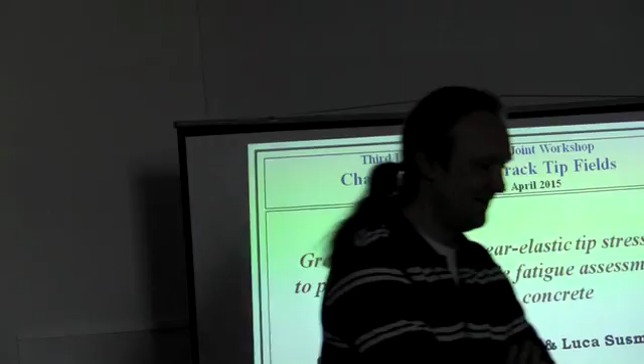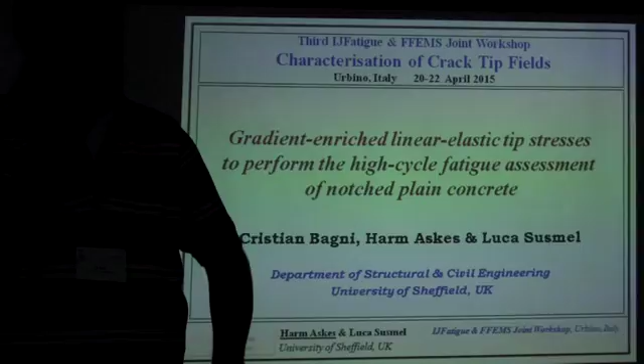Good morning. Yeah, you'll be the finger. Okay, I'll be the finger. Yeah, we decided to go for a double act because there's some stuff in our talk that I don't understand, and there's some stuff that Luca doesn't understand, so we better do it together. Probably if you look at the title, most of it is bread and butter to you, but I want to

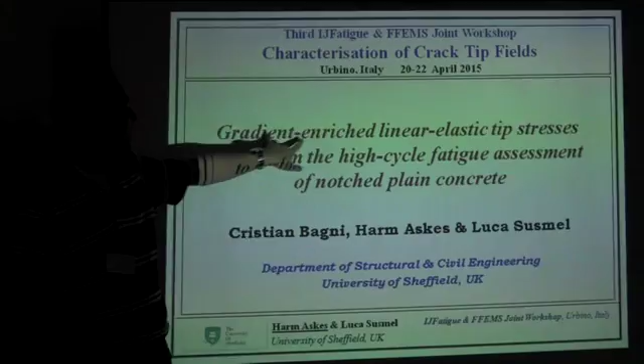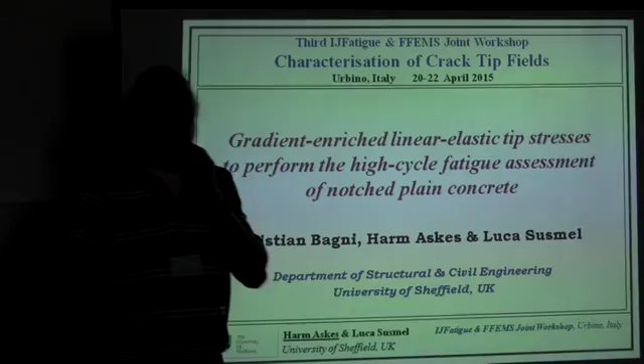Pick up two keywords. The gradient enrichment, where we fiddle with the elastic stress-strain relations to add some extra terms. And also the last one, concrete. I think there's a few civil engineers among us today, I'm one of them. But I think most of you are either mechanical engineers, physicists, or even better.

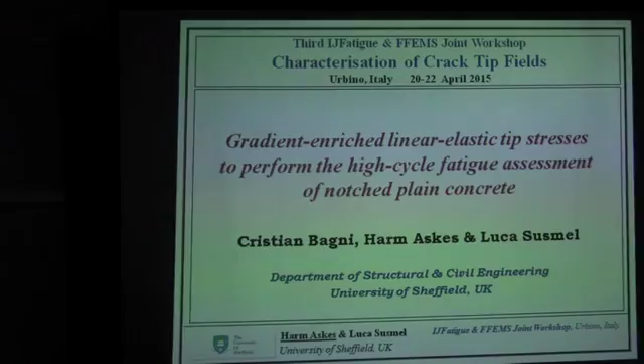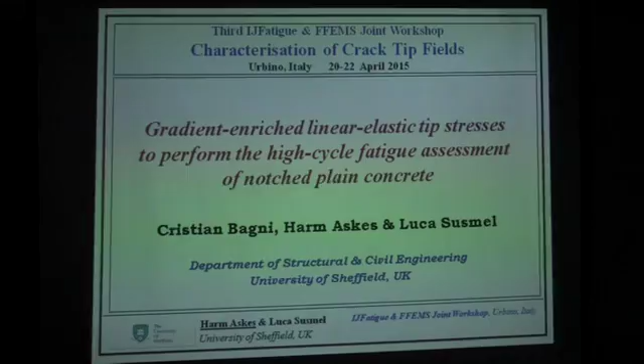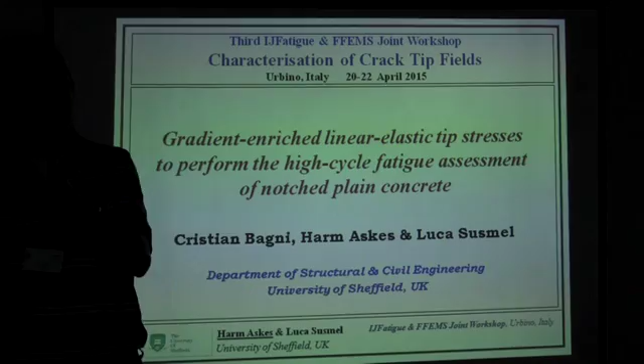Why concrete? Concrete is generally seen to be a bit of a messy material, difficult to control. But it has one nice aspect that suits us today: you can actually separate microstructural geometry from strength. Strength in concrete is governed by the water-cement ratio, and you can in a way control it independently from the sieve curve of aggregates that you chuck in. Yeah, so that gives you something nice to play with.

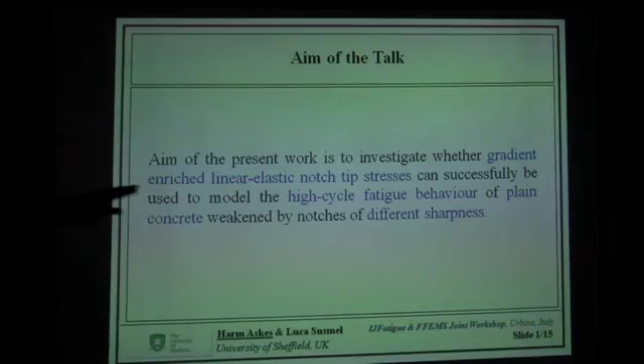This is what we're going to do, so I suppose that's more what you would expect from us. Notch tip stresses, high cycle fatigue, notches of different sharpness and so on.

Okay, when we talk about fatigue of concrete, as with metals, there are a lot of aspects affecting the fatigue behavior: geometry, shrinkage stresses, aging, and so on. But as for metals, the most important aspect is the presence of non-zero mean stresses.

Plus there is another problem: concretes work under cyclic compression as well. So we need a good tool, first of all, to take into account the mean stress effect. By analyzing a large number of experimental data, we have observed that we can simply use the extreme stress in the cycle to perform the fatigue assessment of concretes.

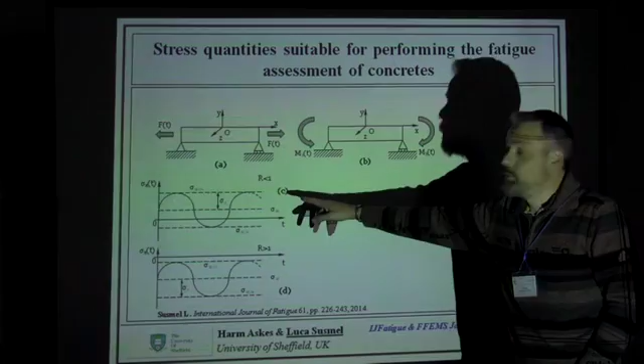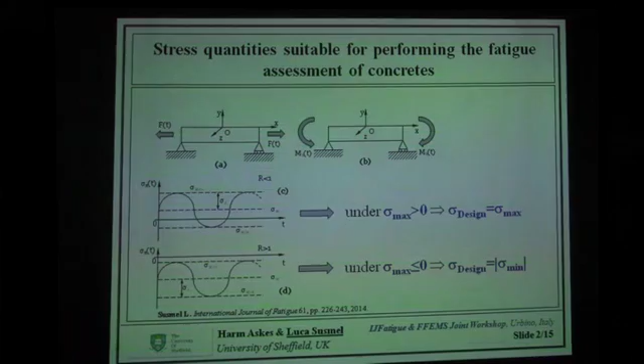In particular, when the load ratio is lower than 1, that is when sigma max is larger than 0, sigma max, the maximum stress in the cycle, can be used as the design stress to estimate fatigue lifetime. But when your concrete works under cyclic compression, basically you get the mirror stress, so the absolute value of the minimum stress in the cycle can be used as a design parameter.

If you start considering the high cycle fatigue behavior of concrete and you plot the amplitude of the endurance limit normalized by using the corresponding reference strength, that is tension or bending under tension and bending, or the static strength under compression, what you see here is that there is a clear mean stress effect. This is true under either tension or bending, but this is also true, slightly evident, under compression.

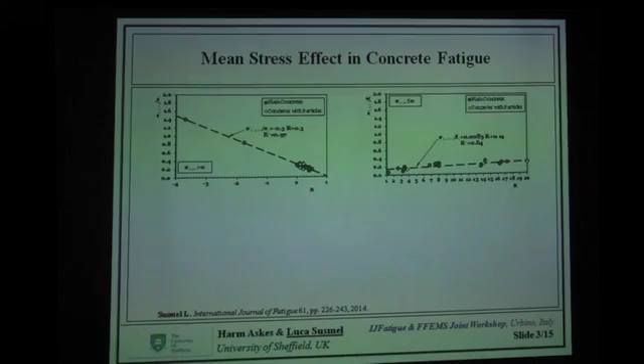But if you use the design stresses as we defined them before, you can see that even if there is a certain level of scattering, the normalized endurance limit in terms of extremes of the cycle allows the data to fall within a quite narrow scatter band. So the idea is that we can directly take into account the mean stress effect by using these tricks, that is the extremes of the cycle, to perform the design.

And according to this general idea, we had to manipulate the theories we are using in order to be able to take into account the mean stress effect.

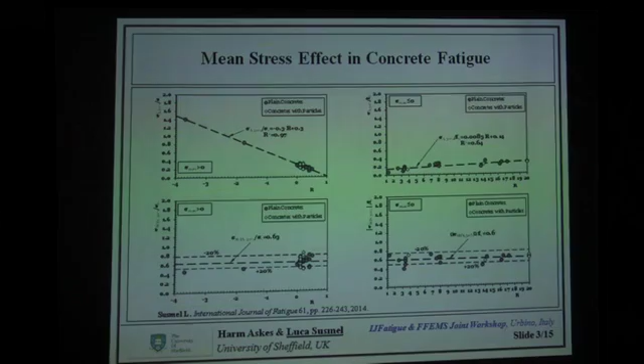So the first theory we need is the theory of critical distances. Of course, I'm sure you all know this theory. Basically, the idea is that a component is in the endurance limit condition when an effective stress, which depends on a given material length, equals the plain material endurance limit.

So now, since we'll be dealing with bending, everything is expressed in terms of maximum stress in the loading cycle. But the question is, how do we calculate the effective stress?

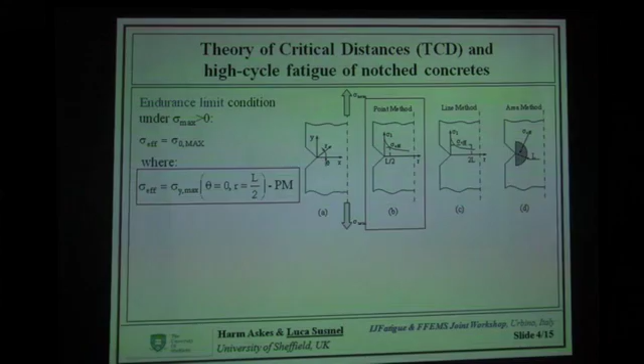There are different strategies. We can move a bit away from the notch crack tip: this is the point method, and the effective stress is at the given distance from the notch tip. Or we can average the stress over a line, this is known as the line method. Or finally, we can average the stress over a semicircular area which is centered at the tip of the notch.

The common feature of these three formalizations of the same idea is that L is a material property which can be calculated by using a linear elastic fracture mechanics property, the threshold value of the stress intensity factor, and a continuum mechanics property, which is the plain material fatigue limit.

But when it comes to concretes, the problem is that it's very difficult to determine the threshold value of the stress intensity factor, simply because they are super brittle. So we need a trick to be able to estimate L, even if we cannot determine the threshold value of the stress intensity factor.

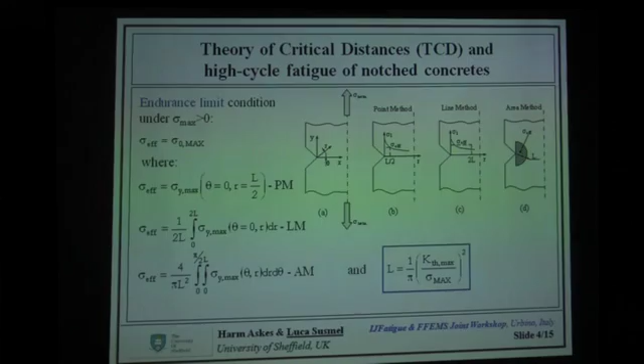To do so, we can use the point method. If we test a notch with a given root radius, we can plot the linear elastic stress field in the endurance limit condition, and find the point at which the local stress equals the plain material endurance limit. That distance is equal to L divided by 2.

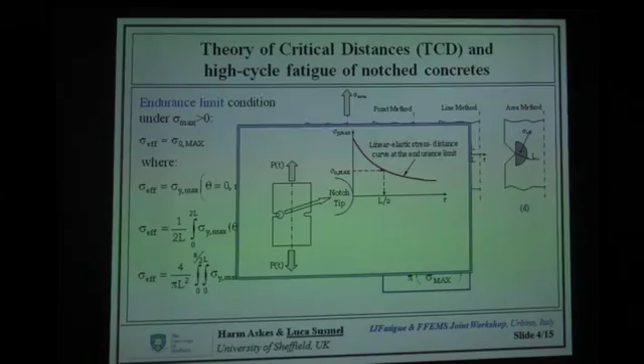So this simple experimental approach is based on the point method, and this is the trick we'll be using to estimate L for the concrete we tested. So we had one L, big L, that's for the TCD.

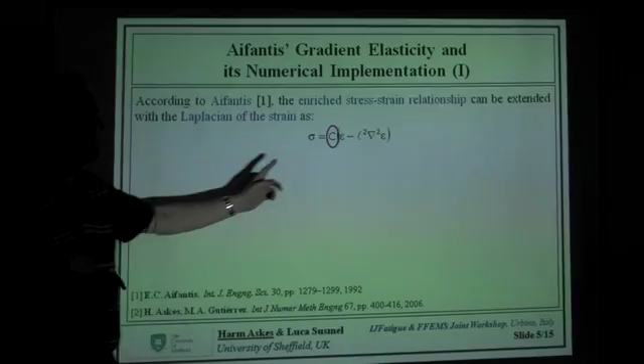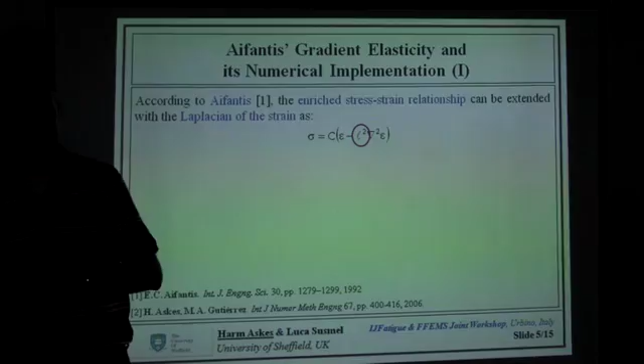I'm going to talk about another continuum mechanics concept called gradient elasticity, where we have a relation between stress and strain, sigma and epsilon, as usual linked with the constitutive tensor C. But we also add an extra term, the second gradient of the strain, pre-multiplied with a parameter that by necessity has units of length squared, so that's a length scale we call small l, the gradient elastic length scale.

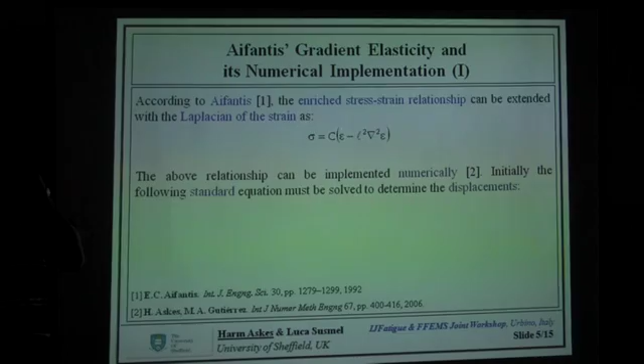Now there is of course the continuum theory. I'm a numerical guy, so I like finite elements and implementations. It's not super difficult to implement. Let's jump straight to how you do it.

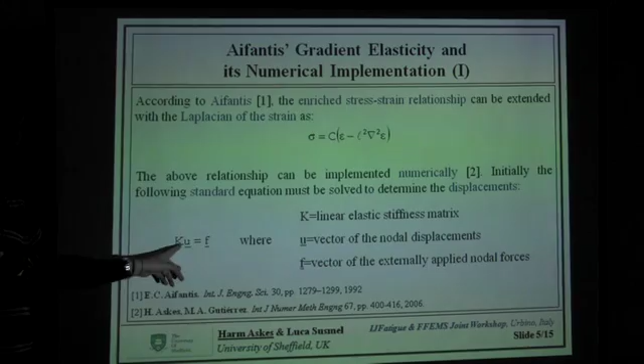The beauty of this mathematical structure is that you can implement it in two stages. The first stage is your standard linear elastic stress strain relation that exists in any finite element code: stiffness matrix times displacement equals forces. As simple as that.

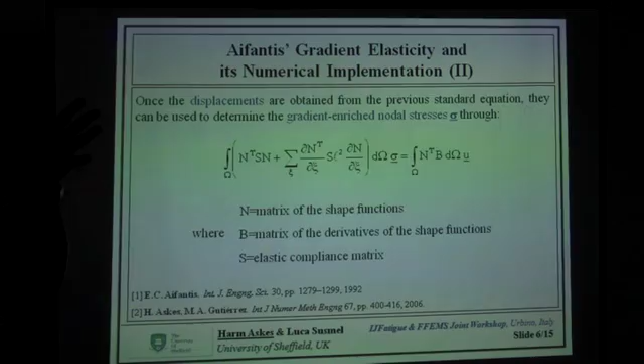But then those displacements are used in the second step as a source term on the right hand side, pre-multiplied with some shape function stuff, don't worry about it now. We've got a system matrix which is almost like a mass matrix, not exactly, almost like a mass matrix and almost like a diffusivity matrix. That should be available in most finite element packages. That together pre-multiplies the stress, which is then your unknown.

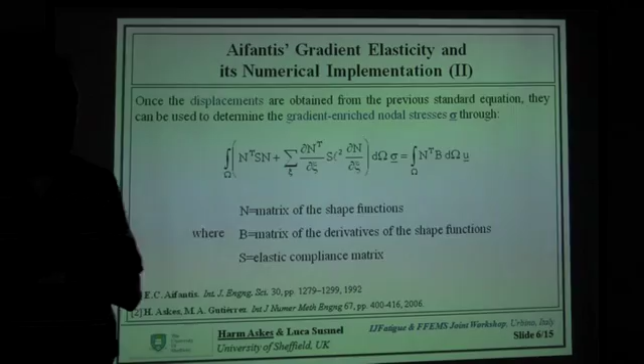So these are now the gradient enriched stresses, because the L parameter, small l, appears inside the matrix. That gives you a gradient enriched stress vector. The nice thing about those gradient enriched stresses is they are not singular at crack tips, at sharp crack tips. They are smooth, and that was of course the main reason why that theory was put into existence.

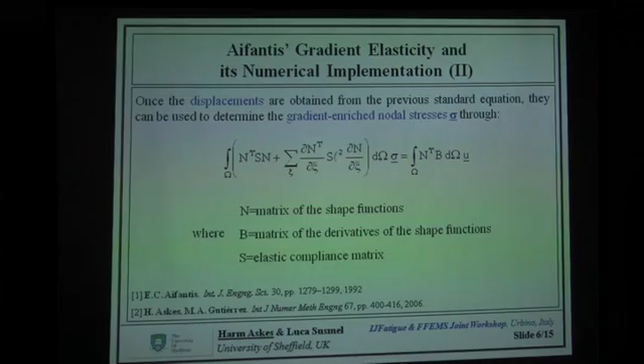So we have two theories now, and the next step for us was running our experiments, because for me, when we started, it was very surprising to discover that no one so far has tested plain concrete under fatigue loading by exploring the effect of the notch sharpness. So we started designing our experiments.

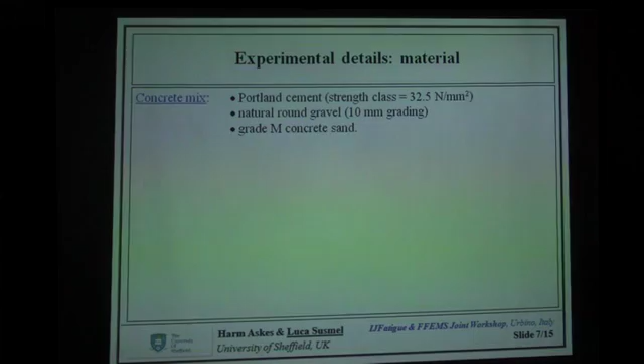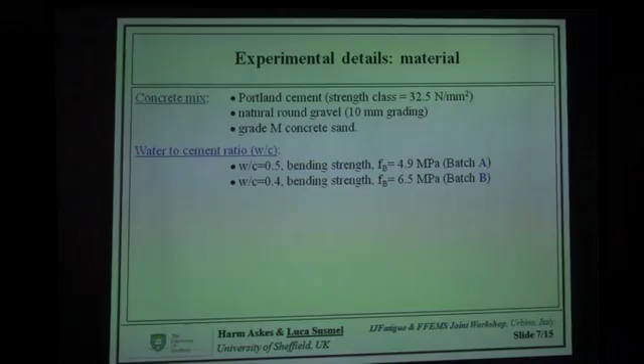We chose a conventional concrete mix, a very basic concrete. When manufacturing the samples, as Harm was saying at the beginning, what we did was play with the water to cement ratio, moving from a value of 0.5 down to 0.4. In the first case, the corresponding bending strength is 4.9 megapascals, and in the second case it is 6.5 megapascals. So by keeping the main ingredients the same and simply changing the amount of water, we can really change the strength of the material. But for the two batches, the microstructural features are the same, because the main ingredients are the same.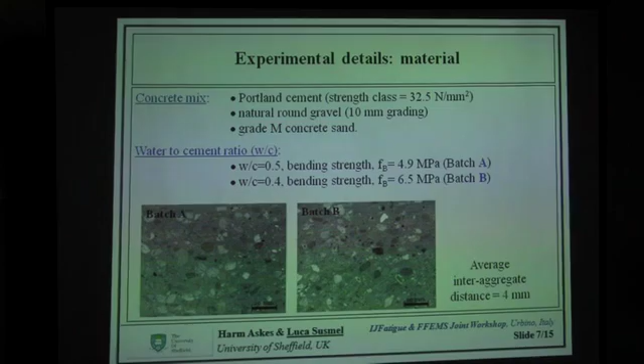By spending a very long time, we came out with this nice number, 4 millimeters, which is the average inter-aggregate distance, the average distance between two adjacent stones. So basically it's the same material.

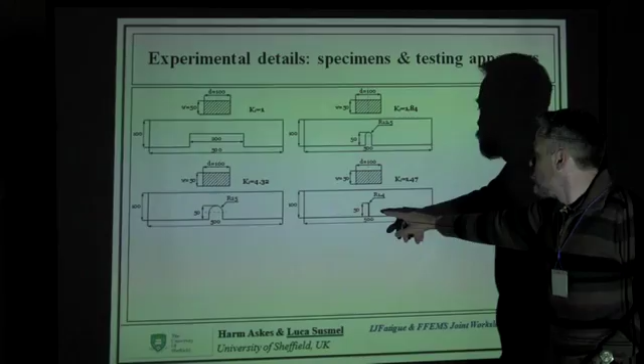So after that we cast our samples. These are the plain samples. We changed the notch root radius. For the very small radius, in the concrete world that's basically a crack, we simply used a saw to cut a slit. The other notches were cast in. This is the shaking table we developed in Sheffield to test these samples, because the idea was investigating the endurance limit, so we needed to run tests for a very long time. A simple basic configuration, 4-point bending, able to measure the applied forces cycle by cycle and the displacement.

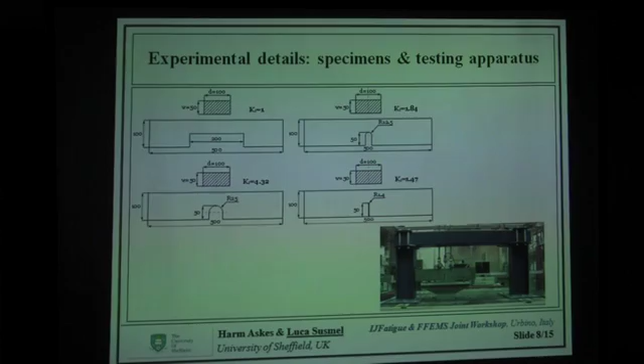Basically what we did was use Dixon's method, the up-down method, to determine the endurance limit at 2 million cycles to failure. This is the standard approach for fatigue people, also suggested by different standard codes, so we didn't invent anything. We applied the theories and approaches we all know to determine the endurance limit for this material.

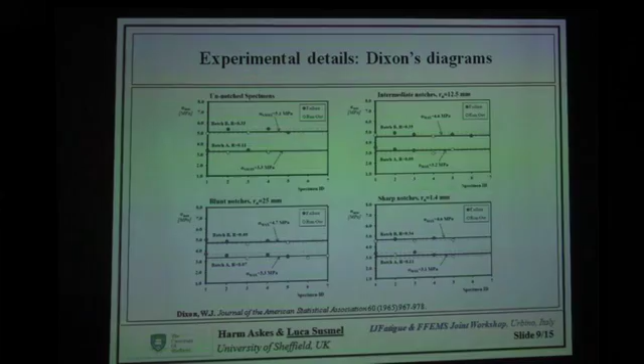Of course, when you get failures running your test, you can explore the material, the crack, basically the crack surfaces.

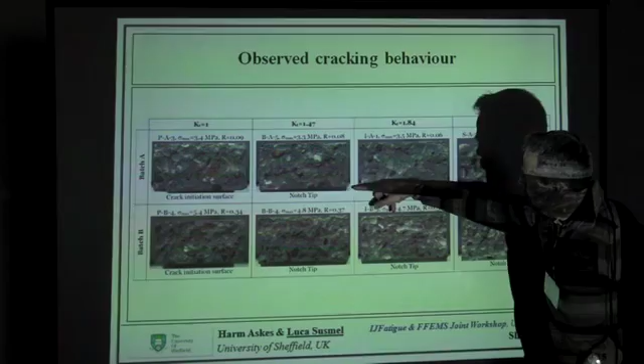And it's a very interesting approach, in the sense that cracks were seen to initiate in these highly stressed regions. The initial crack was due to the debonding between the matrix and the aggregates, and after that the cracks were seen to keep propagating in the matrix. Actually, a small crack was enough to result in a faster fracture of the sample.

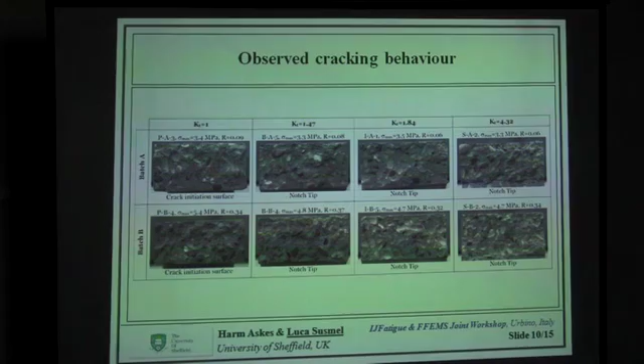We tested our sample at a frequency of 10 Hz, gathering all the information we needed at 1 kHz, and we were capable of completing a cycle after detecting the presence of the crack. So it was like crack there, bang, specimen broken. That was very nice, because there was no plasticity, and our theories are all based on a linear elastic constitutive law.

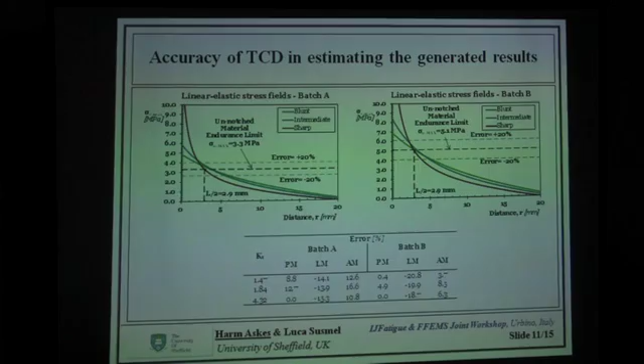Okay, now we're going to keep some of those LEFM ingredients and add a little bit of gradient elasticity in there. Because we have finite crack tip stresses, we thought, okay, let's use those finite crack tip stresses and check that against the unnotched specimen reference strength.

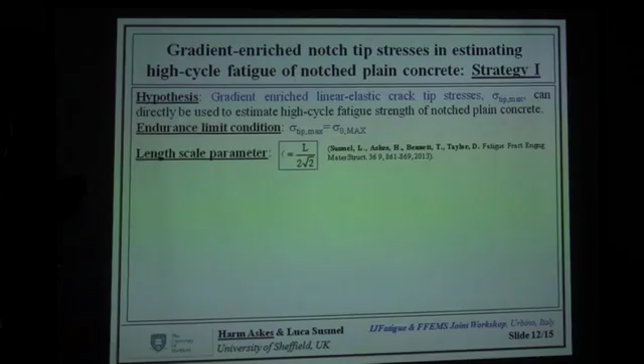Most of the estimates are on the safe side. However, the unnotched specimen is slightly below. Overall, the picture's not so bad - it's reasonably reassuring. But we thought, okay, can we do a little bit better than that? And why actually is the unnotched one below?

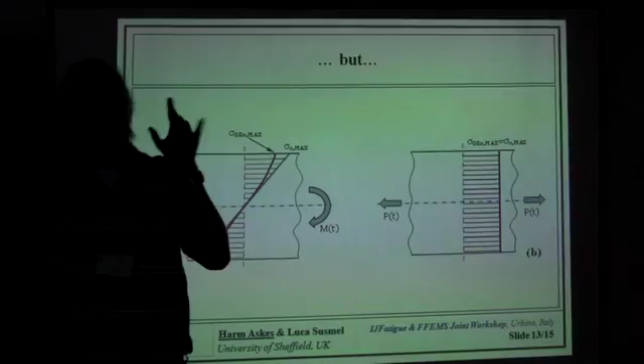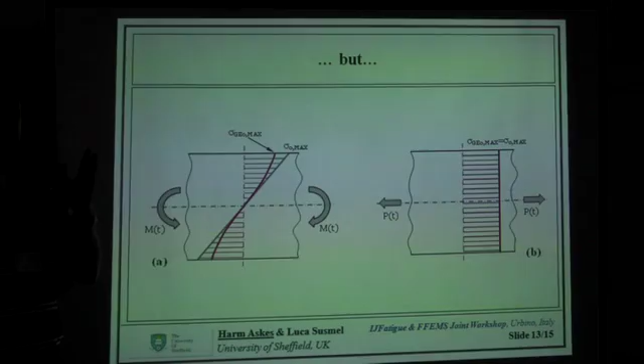Well, if you go back to bending theory, let's go back to the tensile test first. We have a constant stress across the specimen, as you'd expect, and there's no gradient there in stress. Therefore, the gradient term, the L squared term, lambda squared, doesn't become active. However, if you bend it, you've got a linear profile in classical theory, and that introduces the gradient effect, especially at the boundary, and the actual gradient-enriched stresses are the red line here.

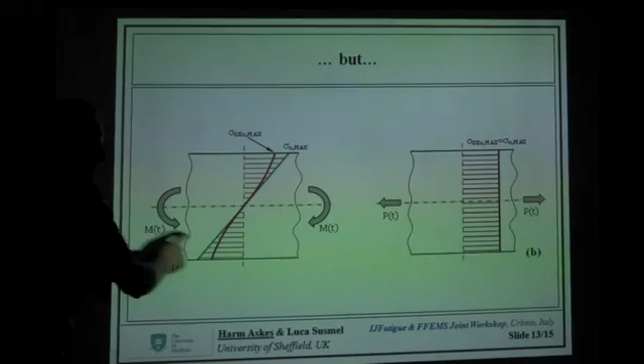So there's a slight deviation from classical theory. We thought we should probably use the red line as a reference in the other graphs. So that's what we're doing with strategy 2.

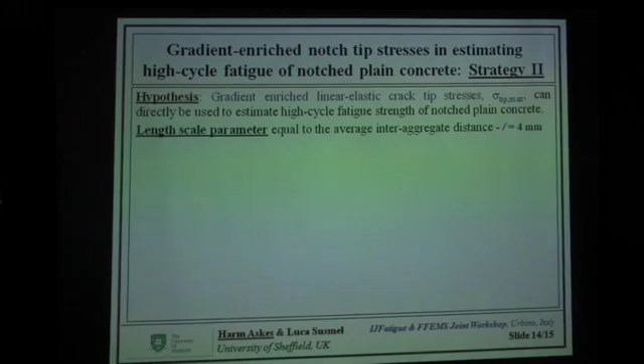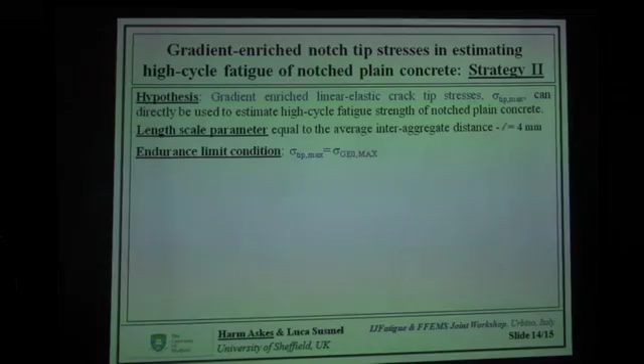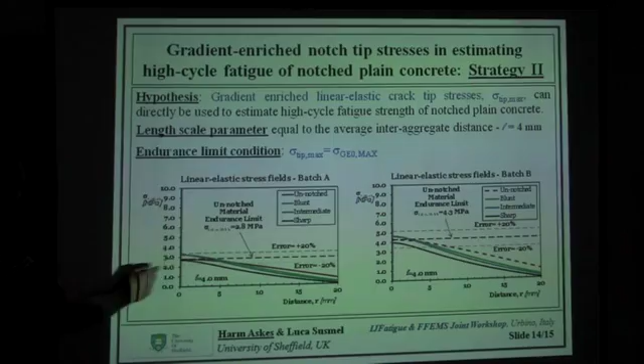We also thought, okay, whilst we're deviating from TCD, let's just forget about the relationship between small L and big L - let's just refit small L from experiments. We had an idea earlier that L should be equal to the average inter-aggregate distance. So we're taking now the maximum stress at the tip based on the gradient-enriched specimen strength, and that came out very, very beautifully, where everything is within 20% and on the safe side. So we're very pleased with that.

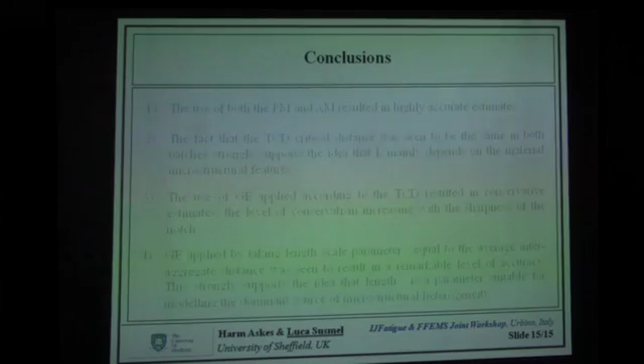And since we are a bit late, the main conclusion is that we cannot do that with metals, because if we pick a sample and, for instance, do something to it to increase the grain size, what happens is that the strength changes as well. But with concrete, you can keep the microstructural features the same while changing the strength.

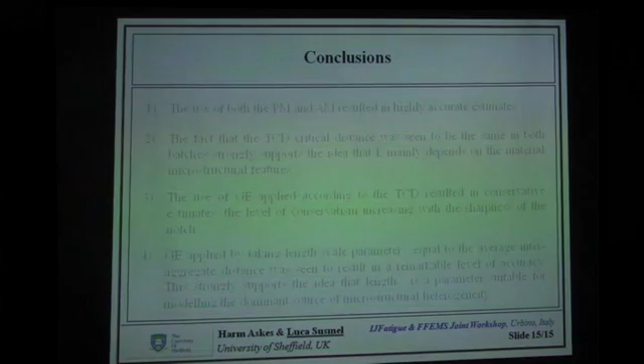So, for the first time, we were capable of proving that the length parameters used in critical distance-based approaches of all kinds - because there are other formulations of the same idea - are based on the material's microstructural features. On the other hand, you need the strength of your material. So eventually we could uncouple the two aspects: L depends on the material, and the reference strength is the strength of the plain material. Thank you very much.